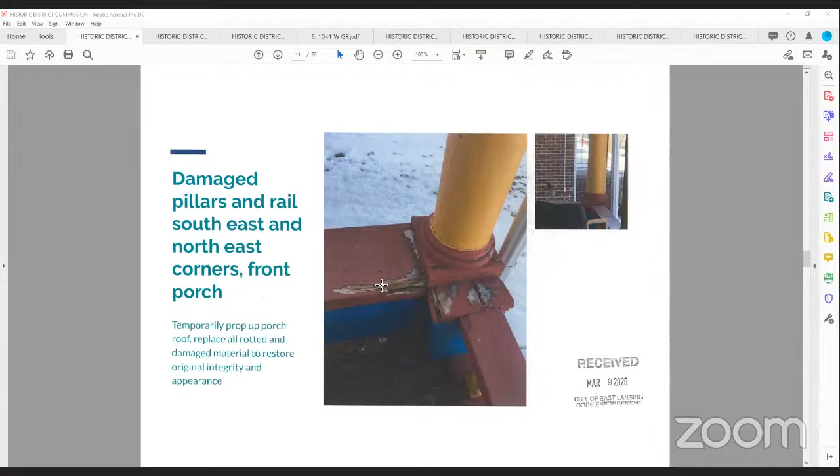The other item is regarding the decking. I noticed within your application it was indicated the decking would be replaced by 2x without any secondary dimension. The decking is obviously not tongue and groove, it appears to lay against itself flush, but I'm not sure it's the same width as it is the same height. It's extremely important that the decking be recreated in exactly the same dimension as it is now, including the bull-nosed, curved edge along the front. That's my specialty, replicating things that already exist. The plan is to acquire whatever material I need and mill it to be exactly correct.

It's also mentioned that there's damaged siding. The only damaged siding I could see, and again I was only there for about 5 minutes this afternoon, is some damaged siding going up the front porch, on the right side of the porch. Is that the siding you're referring to repairing?

That I am not certain. I'm kind of coming in late to this, taking over a couple days ago. I'm not sure exactly what that refers to, but it's that old cedar shake siding, so it could be. There are just little spots throughout the house that I know are kind of failing, but I didn't realize that was included.

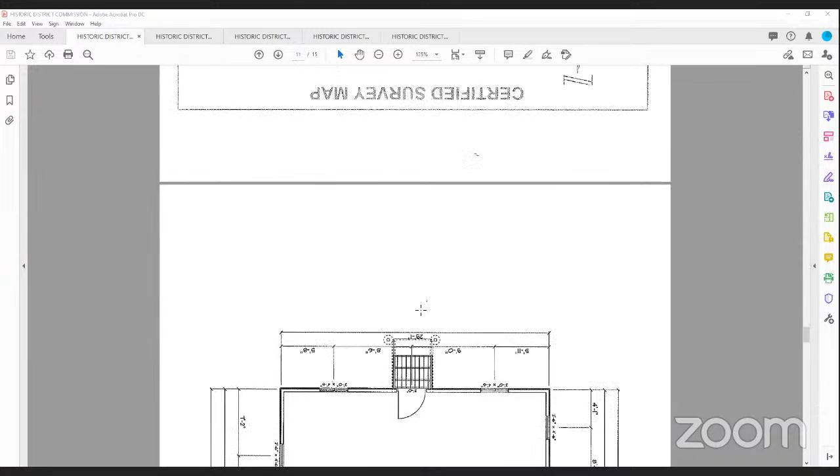And they do have one arch window upstairs, which is an Andersen, I'm quite sure it's an Andersen 200 series, which is vinyl clad. We can get that same window, vinyl clad windows like that, with the concealed grid in them, with the grid between the glass, which will basically look just like it does now. It's got grids on it now. That way they would all look alike. But the siding is in bad shape.

So it needs to be completely redone. This is Commissioner Wing, if I could interrupt for a moment. It's my understanding in reading the application that the exterior siding is aluminum. Is that correct? Yeah, it's aluminum. And there's wood siding underneath it. Okay, and you're proposing removing both the aluminum siding and the wood siding, so both layers of siding would come off. Yes. Okay, thank you.

Then if we go back with vinyl siding - a few years back, time gets away from it, we did put vinyl siding on a house in that area on Hill Street. We used a matte finish triple three vinyl siding, and it looked just like 3-inch wood siding, matte finish, like it had been painted. But they tore the house down when they put the condos in there, so I can't really show you the house. We've done a lot of work over in that area on Crescentwood too. But I think that would be the best way to fix it.

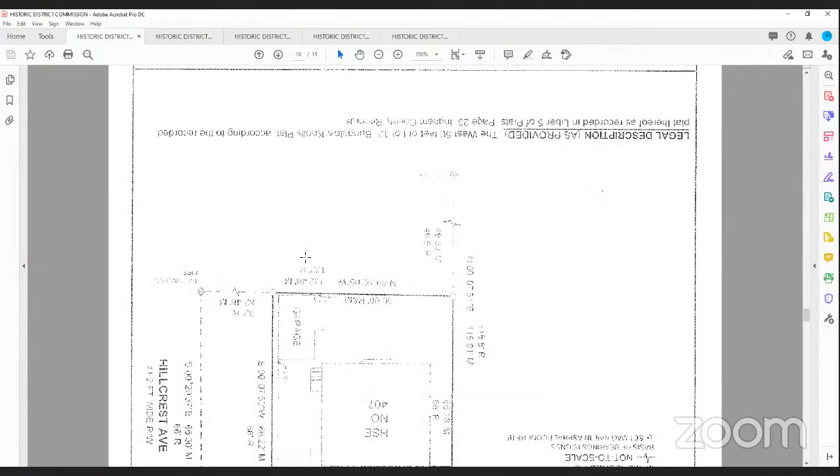Okay, thank you. I'm going to skip item number 6 because insulation and paint really doesn't come into the commission's purview. But item 7, it has a question mark. It says install 4-inch overhang on roof of house. Can you explain what that means, please? And is that part of this certificate of appropriateness? I notice it's not mentioned actually in the application itself, but yeah, it's part of this entire project, right?

Well, yeah, I haven't discussed that with Mara and Ben that much. There's 2 or 3 different ways of doing that. Let me address that. The 4-inch overhang is very common in the historic district on the older houses. For some reason, this Cape Cod doesn't have that, and a lot of water flows down on the siding and the windows. And the front door.

And the front door, yeah, which will be taken care of with the porch. But the 4-inch overhang will protect the windows and the siding from water flowing down on the side of the house, on the gable side. And again, we just had a whole waterproofing project last summer because we've had a lot of flooding in the basement. So that's just an extra step to help improve the safety and the condition of the home more generally.

All of our neighbors have overhang, it's just this house that does not. I'm just trying to understand - are you talking about a 4-inch overhang on both the front and back of the house, as well as the overhang over the gables? So the entire roof line would be extended 4 inches completely, or just the front and back roof line? No, all the way around the house. Okay.

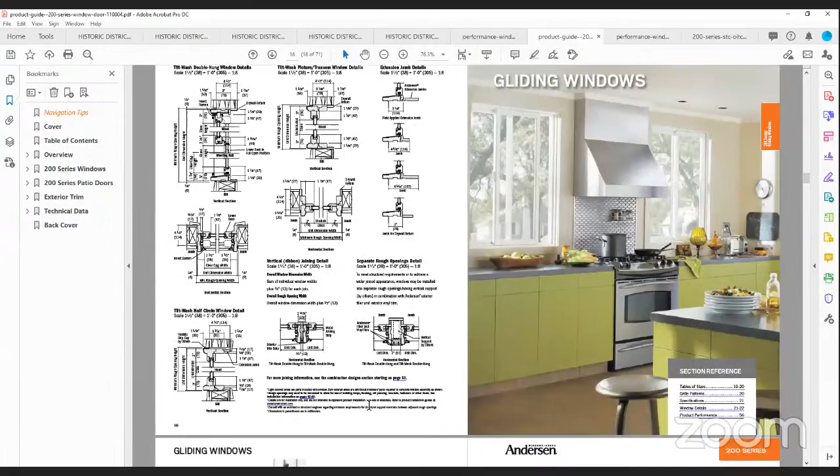Typically when a home is going to have its windows replaced, any contractor, or if you work directly with Pella or Andersen, they'll come out, measure the windows, and give you an actual estimate with schematics, similar to a couple of the other applicants earlier. Collingwood had a schematic of what the window looked like. Do you have that?

Mr. Mead can address that because we've asked him for a quote. But do you actually have that quote? Was that provided to Mr. Parcell? That's the detail we need to be able to make a decision.

Okay. And Jake, Mr. Parcell and I can talk after the meeting to determine if there's a way for us to meet secondarily to talk about the windows. If you do have an actual quote, we could potentially talk about it separately. But at this point there's not enough detail in the application regarding the windows to move on it, which is why I'm with Commissioner Hendricks at this point, since he made the motion.

Okay, I just assumed everybody knew what an Andersen 200 looked like or was. Right, and we do understand what the product looks like, but that product is individual for each application. For any homeowner putting in a new window, the window looks slightly different, and there are options that could differ depending on the person buying the windows.

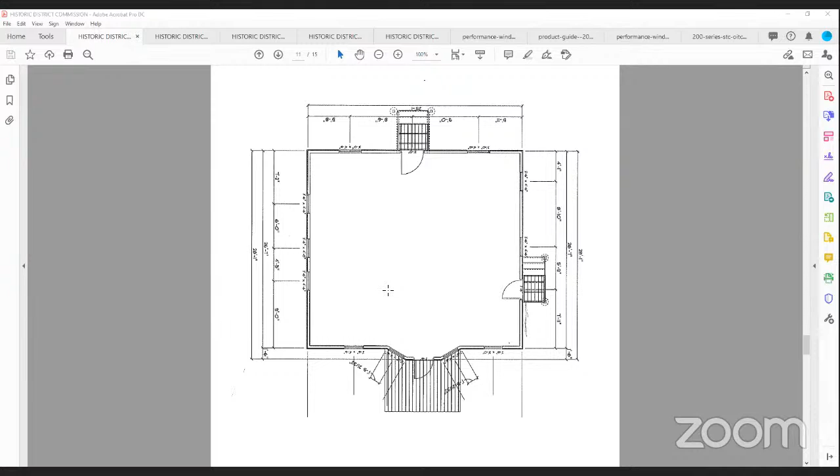This is Aron Sousa. Based on Secretary of Interior Standards 5 and 6, I would move to deny the porch with the stipulation that a wood stoop is... actually, I want to withdraw my motion. So they have a temporary stoop and a rail that doesn't look like it does anything, and we don't have a picture of a roof.

So I have a lack of comfort with approving a porch and porch roof because I don't know what it would look like. On the other hand, I absolutely understand they need to put in a real stoop that you can walk on with a rail. So I'm a little confused, Jake, as to can they put in a stoop even if we pass a motion that says no porch?

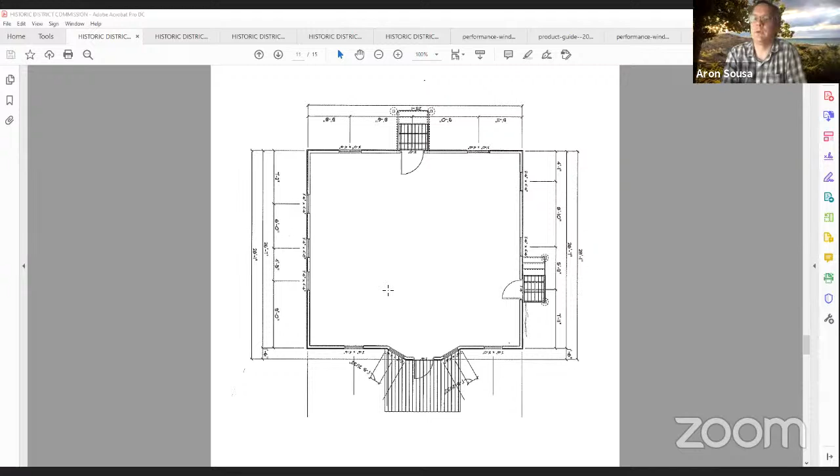That's their temporary one. So I would assume that was because the foundation had to be trenched, and so they had to put something back up after the waterproofing was done.

So they could replace that with something sturdier, even as a temporary, even if we did not approve a porch, given that they put something in this time. Is that fair? Per usual, I think temporary additions are fine, not our thing.

So I would move, based on Secretary of Interior Standards 5 and 6, to deny the application for a porch and porch roof on the front or side. Commissioner Hendricks, second.

I have a motion by Commissioner Sousa, seconded by Commissioner Hendricks, to deny a front or side porch or roof. Yes, that's what I have.

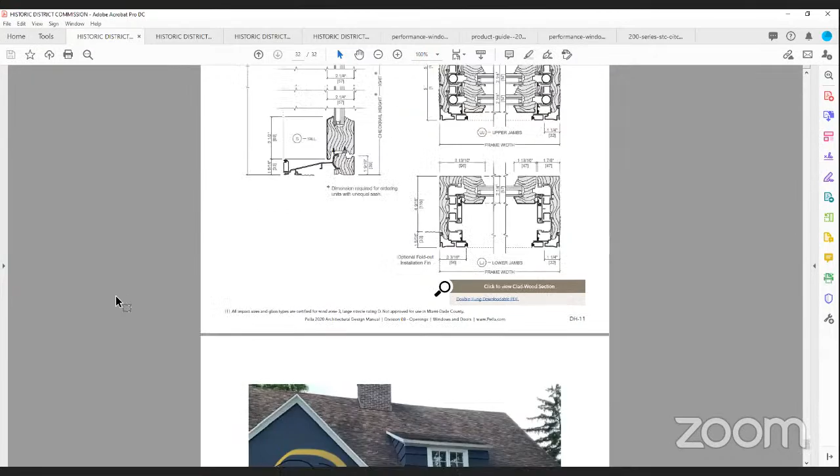Thanks, Jake. This is Jason Weller, and yeah, pretty straightforward. As far as we can tell, talking with the folks from Pella, the windows are a combination of replacement windows from maybe sometime in the range from the 70s to 90s. It's not all entirely clear. It looks like they're a mix - some are Andersen or Pella windows. Actually, I think these on the front side are Andersen. The ones that we're planning to replace that aren't street facing, I think, are a mix.

So as Jake pointed out, we made every effort to match up with the grids of all of the windows that we currently have in the house, so that there should not be any difference. If you look at the picture from the front, you'll notice that the window to the far right, which is our kitchen - those grids are actually out of the window, because right now most of the windows, the grids just pop on from the inside. With two small kids in the house, it's been a pain with windows getting slammed and opened, not by adult hands. It's been hard to keep the grids locked in, but we've tried as much as we could.

So I think that I'm happy to answer any additional questions the commission members might have. Thank you, Jason.

So are any of these windows that you're talking about replacing, are any of them original to the house? Not as far as we could tell. Like I said, it looks like the majority of them have been replaced at some point, but it's kind of haphazard as to guessing the age. The one window we're a little unclear on is the small window that's next to the front door.

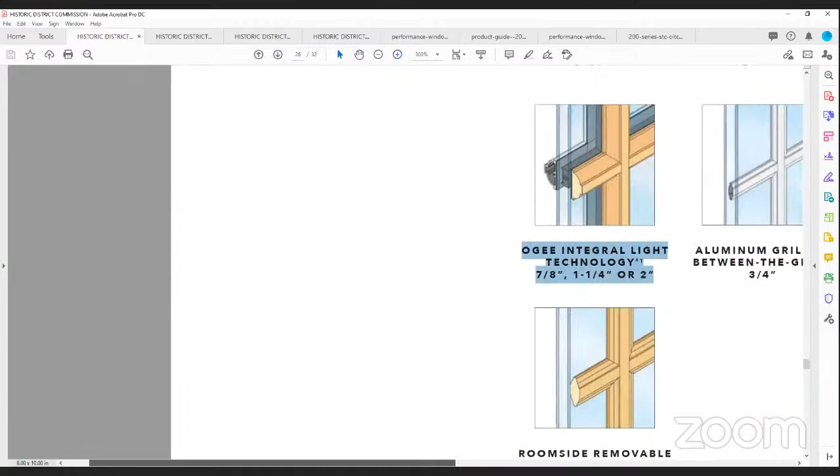So it's not removable. It looks like Pella's, the ones we learned about in our session with Mr. Otis. Yep, it's the two windows with the foam inside, matched up on each side, so it essentially divides the pane on the interior without inserting them. Mr. Weller, is that your understanding of what this quote contains, that type of grill? That's definitely it. That part I did know because Tom was very explicit that the grills would not be removable. Yep, it's right here, it says grill ILT, and that's what that is. So it's the interior with the exterior placed over it to divide the window.

Mr. Otis told us at our meeting that if you look down into it, you won't be able to tell it's actually one pane. Right, and I know what it is, I just wanted to make sure that's referenced correctly and completely on the quote we're looking at. Yep, so it's right there. So by Commissioner Gray saying that and you confirming it, got you. Okay, thank you Commissioner Gray for finding that.

Any other questions from the commission? Okay, thank you. I will open it to the public hearing aspect. If there is anybody on the call or in the audience who would like to speak to this particular application, this is your opportunity to speak regarding 345 University Drive. I do not see any hands. Okay, thank you, so I'll close the public hearing.